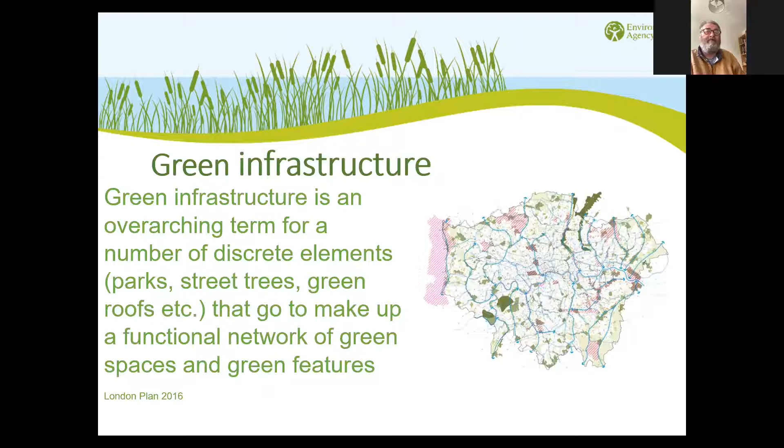Green infrastructure is an overarching term for a number of discrete elements, such as parks, street trees, green roofs, rivers and streams, that go to make a functional network of green and blue spaces across London. These are important in their own right, such as habitats and parks for recreation, and features of landscape and cultural heritage. However, by considering their design and management together, they can deliver benefits greater than the sum of their parts, either through delivering multiple benefits on specific projects or linking to larger landscape-scale initiatives to provide wider in-combination benefits.

Within London, the All London Green Grid is the policy framework to promote the design and delivery of green infrastructure for the benefit of people and wildlife. This includes blue spaces such as the Thames and other rivers, canals and ponds, and it's planned to provide a range of benefits including recreation and amenity, contributing to climate change adaptation, improving water quality, flood mitigation and reduced flood risk through sustainable urban drainage systems, providing greater appreciation of landscape and cultural heritage, protection and enhancement of biodiversity including within new developments, and increasing recreational opportunities and access and enjoyment of open and blue space for the public.

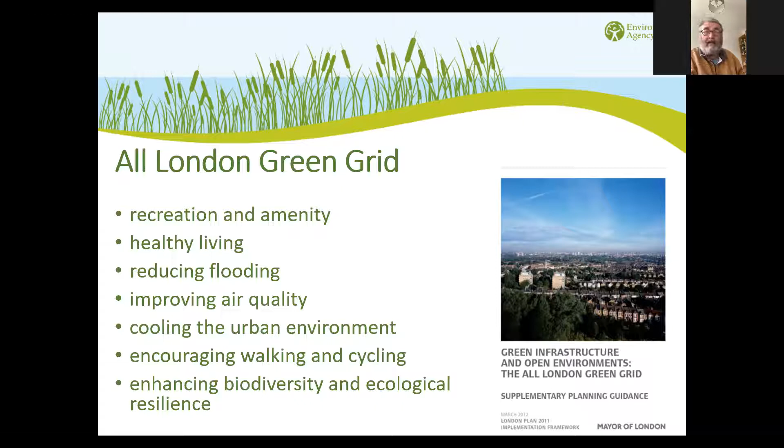Integral to delivering a successful green infrastructure project is the delivery of those multiple benefits, which can be improved through partnership working. This may appear daunting when considering single sites. However, the framework of catchment partnerships can provide support, facilitating work across disciplines and recognising the interdependency between environmental, social and economic processes within and outside catchments, and identifying cost-effective solutions which deliver multiple benefits, often through restoring natural processes and identifying unintentional consequences of actions. Estuary Edges is very much part of that work to identify innovative integrated solutions.

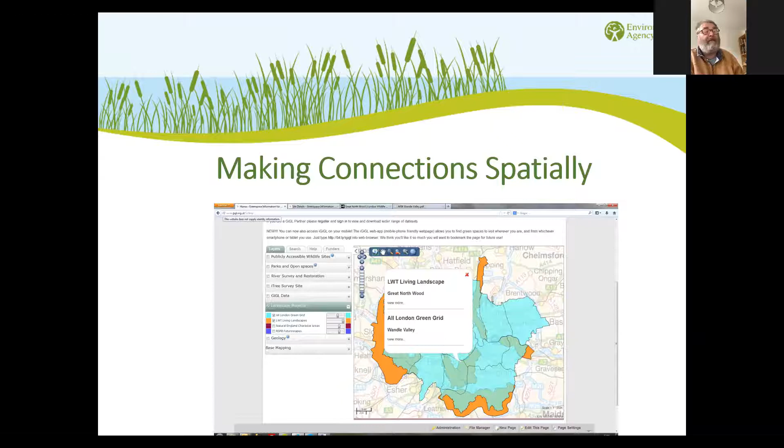To deliver integrated green infrastructure, site characterisation is needed to provide both spatial, geographical and functional context. Geographical analysis simply relates to the proximity of features and initiatives. This, for instance, may include opportunity areas for habitat creation or setback defences, and enables the site to be put into context both in terms of programme and projects, which will assist in scoping out both opportunities and risks for the development.

On a similar vein, mapping can also provide an understanding of function. This could be, for instance, ecological functions such as the migration of species like eels, or wider functions such as improved amenity and flood risk. We can see how this can deliver benefits both within a site but also link into wider catchment-scale initiatives, so where a single intervention may appear quite small functionally, it can actually be put into context with a much wider range of delivery through a catchment-scale project.

In terms of some of the geographical information, looking initially at constraints, some of the issues for the tidal Thames have been encroachment, resulting in loss of intertidal habitat, which is loss of habitat in its own right but can also impact the migration of particularly fish species. There is also potential risk of loss of green and open space next to the river, and loss of brownfield habitat, which often has a unique assemblage of invertebrates and birds. There is also potential for loss of ecological features associated with river walls. Quite often, as a wall becomes more derelict, its ecological value actually increases, and this is the challenge we have in ensuring a new river defence is fit for purpose while maintaining and improving that ecological value. Other issues, which I think Richard will talk about a little, overshading and lighting can also be big issues for successful green infrastructure next to the Thames.

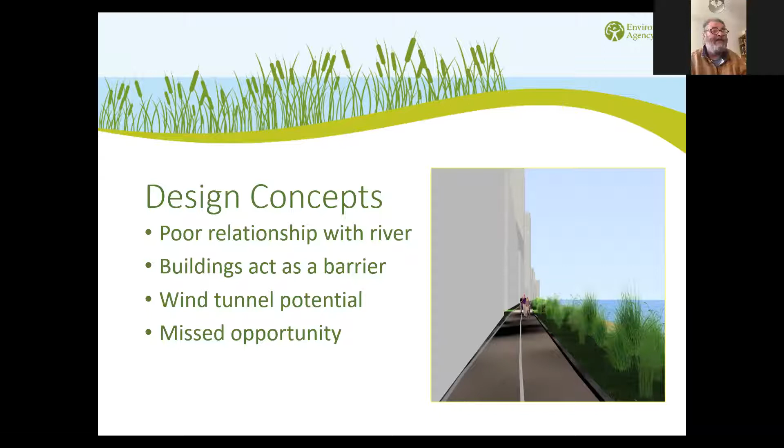On the other hand, and this is very much the concept taken forward through the O2, the Greenwich Peninsula, is the creation of setback defences, sustainable defences, where footpaths are integrated through the defence system, ecological habitats are created, maximising and improving that experience of being next to the river and creating this world-class development.

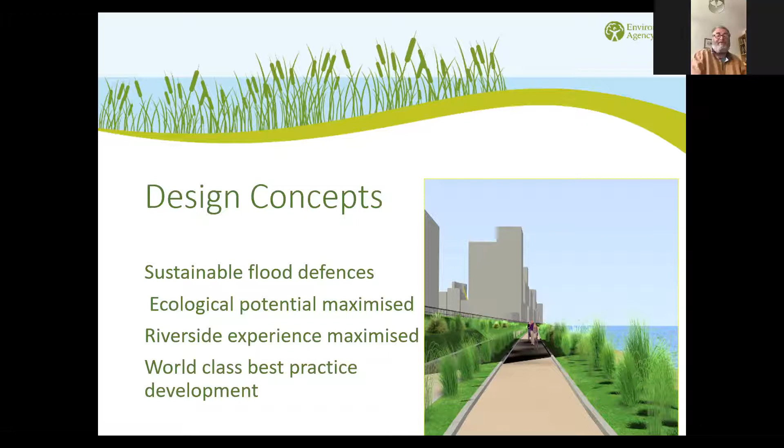So just moving onto sustainable development and sustainable drainage, clearly there is a great benefit in terms of integrating the design to enable sustainable urban drainage to meet a range of environmental challenges, from its original purpose of controlling water quantity to actually contributing to improving water quality, as well as creating new landscape and amenity features.

As part of this, there is now a whole range, a massive palette of different options, from swales to porous surfaces. An innovative solution is with brown roofs, and with this, the use of particularly some of the wasteland rubble associated with much of the Thames has provided a very good system for both retaining water and has also helped replace that brownfield habitat, which was very much a character of the Thames, important for a range of Thames terrace invertebrates, but also a rare species in the UK which is more common in London, the black redstart.

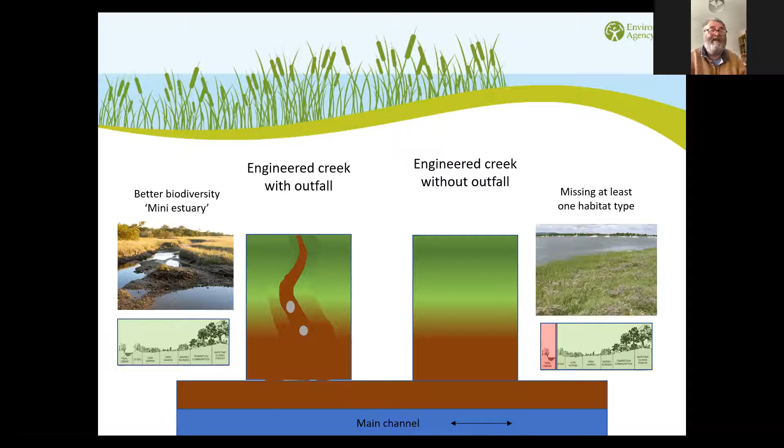I think I just managed to do my time. And that's it. Thank you, Dave. I really appreciate that. That was really interesting, and particularly your comments about making the small interventions in terms of connectivity and how that can help habitat. And I think we'd like to hear more about that in due course.

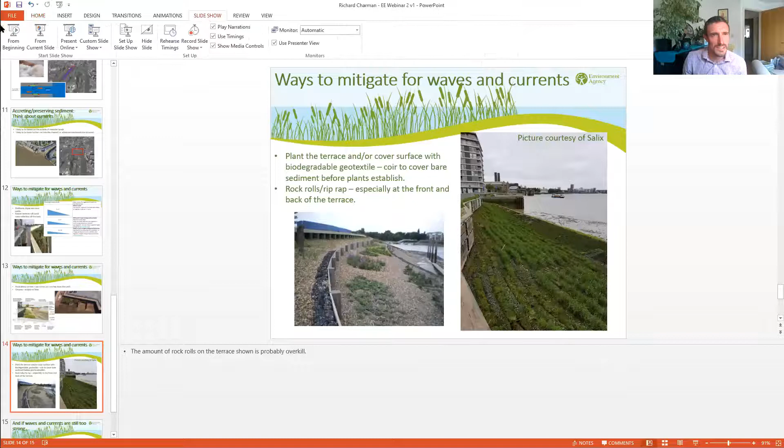So originally I was going to choose a slightly more boring title for this, on how to create a perfect terrace, which effectively is what this is. As a geomorphologist, the sediment element of this and also the levels is probably the most significant to my daily work. But in many ways, litter can be treated as a sediment type as well, the way it's washed into an estuary edge.

So for anyone who's actually looked at the Estuary Edges website to date, and I would highly recommend it, it's set up with a series of design principles, 17 design principles that if you follow, then you should be able to design and build a good estuary edge feature, as we've called them. And within that, principles 3, 5, and 10 cover these elements of litter, sediment, light, and levels.

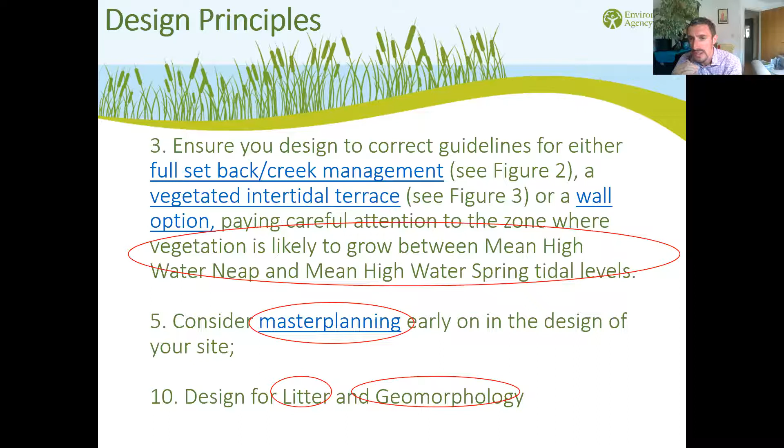And number 10, I think we must have got less adventurous when we got lower down on the list of the design principles, and we said design it for litter and geomorphology. You have to click on those to find out a little bit more information. So I'm going to go into those elements in detail over the next 12 to 13 minutes.

Firstly, getting levels correct. Now, this is actually surprisingly difficult to do if you don't have a local tide gauge, and levels vary throughout estuaries as well, so you can't assume that the level at the mouth of the estuary will be the same inland. So some form of logging device or getting in touch with the local port authority to know exactly what these levels would be is important.

Now, what we're missing predominantly in urban estuaries, such as the Thames, is the vegetated area. I've tried to show, so in a natural estuary, the bottom left-hand corner photograph would show the transition from mudflats through to different zones of salt marsh and then up into more terrestrial vegetation. And effectively what we're trying to do is compress that with an estuary edge feature, as you see in the bottom right-hand photograph, which is, I think, Saxon Wharf in Deptford Creek.

And I've tried to show that in cross-section above that, with the low tide blue water and then going across the mudflat up through the different zones with the salt marsh creek and up into the terrestrial. And the zone that vegetates, the one that we're missing in urban estuaries, is between your mean high water springs, the top line, and the mean high water neaps, the second to top line.

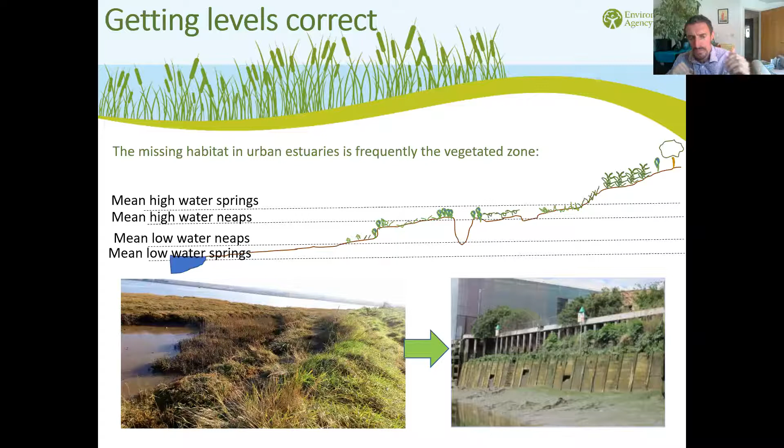Reducing litter trapping. We learned a bit about this with the review and relaunch of Estuary Edges three years ago. By all means, these are still hypotheses in a way, and I think they still need testing with research. If there's anyone from any universities on the line, this would be really useful for us to know more about.

We believe that changing the orientation of the mouth of the creek matters. In my last presentation I went into the three designs: naturalized setback creeks, terraces which are more engineered, and timber bolt-ons. If we're going for the most natural form, you can change the mouth of that creek, and the direction would potentially prevent litter from being washed in.

Generally the prevailing wind, we believe, is what washes litter into these features. The bottom left photographs show the River Roding over to the east end of London, and the green areas show the creek, which is very easy to discern in the top photograph. In the bottom photograph the creek is less easy to discern, but it follows the lush green reeds in a kind of tick shape. Both of them are similar shapes.

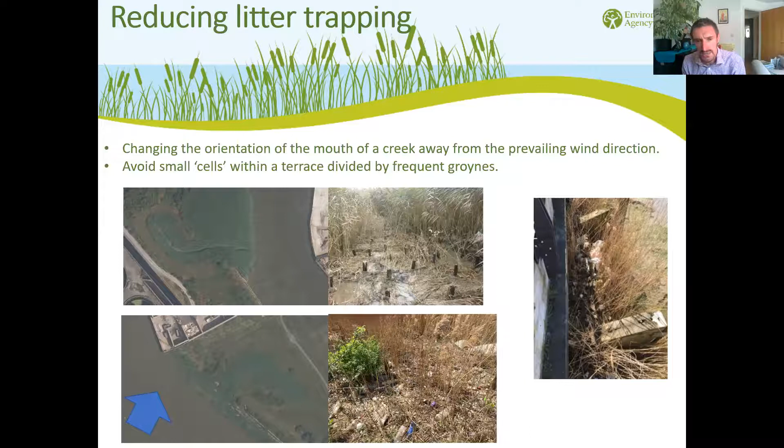Further to that, we believe that tall plants, such as Phragmites, are particularly good at trapping litter. Variation of plant type, as shown at Battersea Wharf in the bottom right, with different levels of plants, would reduce the amount of litter trapping.

We know that the one site where a boom has been used, also at Battersea Wharf in the bottom right-hand corner of your screen, the booms actually prevent fish passage, at least fish from exiting the site. And they tend to break - they have sliders and run up and down with the tide. We don't know any good examples where they've actually been successful to date, so it's led us to the advice that they should only be used if absolutely necessary.

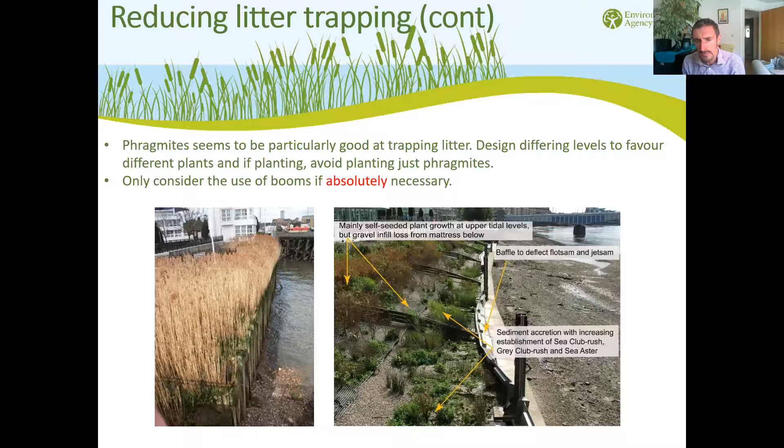Ensuring enough light. This aerial photograph on the right of your screen actually isn't on the Thames, it's on the Medway, but you can see it was taken late in the day, or maybe on a summer's evening, and you can see the length of those shadows from those tower blocks across the mudflat and out onto the water. Now, I can't guarantee that photograph was taken at extreme low tide, so there may be more mudflat there.

Therefore, you know that if you're on the south side of an estuary with a north-facing development, those terraces probably won't get a great deal of light, and they may not be entirely successful in their vegetated nature.

We were presented with the car park with the derelict barge that you see in that photograph, and our advice was to put the terrace on the western side of that built-out area, so it will get the evening sunshine, and to actually avoid the north side of that site. So if you've got the luxury of having multiple sides of a development, we would recommend that the north side is actually avoided, and that there's a concentration of terraces built on the east or west sides.

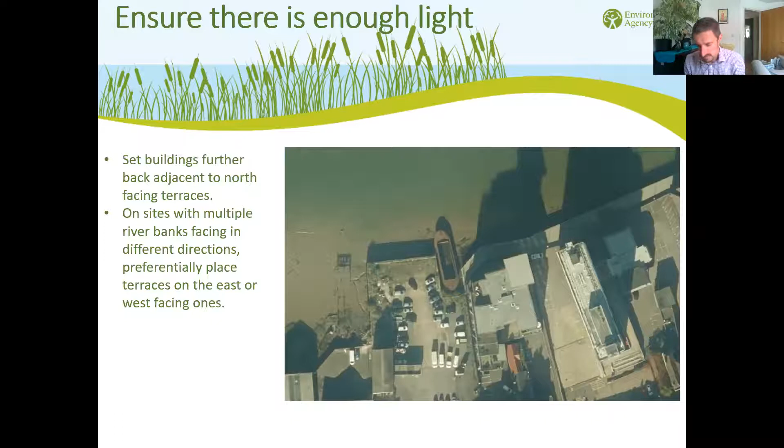Also, in the Medway - this is something I would like to achieve in London, and we haven't yet managed to - the construction of a large, long creek, which has that succession of salt marsh, mudflat through to different salt marsh zones that I showed you in the earlier photograph. That was achieved here on the Medway, and recently I went there with Dave Webb, and we spoke about it.

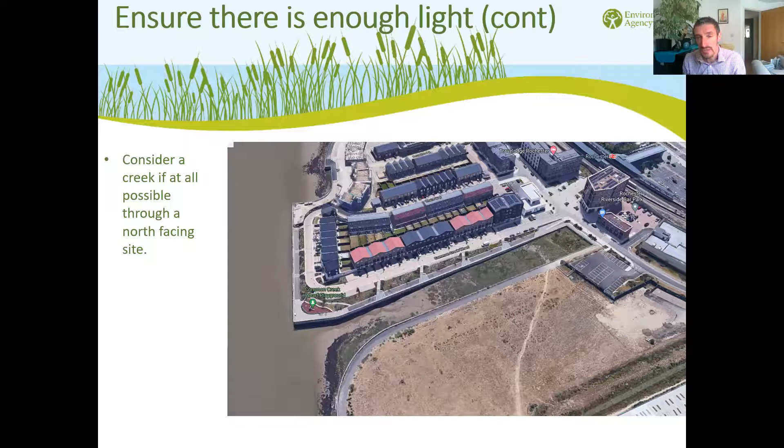Now we know that creek will probably vegetate and fill in quite quickly because there's limited freshwater drainage. So a missing trick with that creek - it is amazing, but it doesn't have the outfall going through it. And that's particularly relevant if your site is north facing as well, because it will get rid of that problem.

The depth of your terrace, now with some of the infrastructure—there may be pipes, tunnels, outfalls as we already discussed, coming to the river's edge—may present problems for the depth a terrace can be designed at. But we found from experience that 1 meter depth seems to be successful. If it's less than 1 meter, there's a higher risk of either the terrace not responding in the same way as a natural mudflat, or wave energy washing out the sediment.

In the worst case, you're seeing one end of one of the sites on the Greenwich Peninsula where washout has happened to the lower terrace, and you can see that really isn't a great depth of sediment.

Equally, drainage holes, so that the mud and gravel in that location doesn't become waterlogged, is important as well. There's a cross section of a site—the site doesn't matter in the middle of your screen—and we think that fill was too shallow in that location. The photograph on the left shows waterlogging.

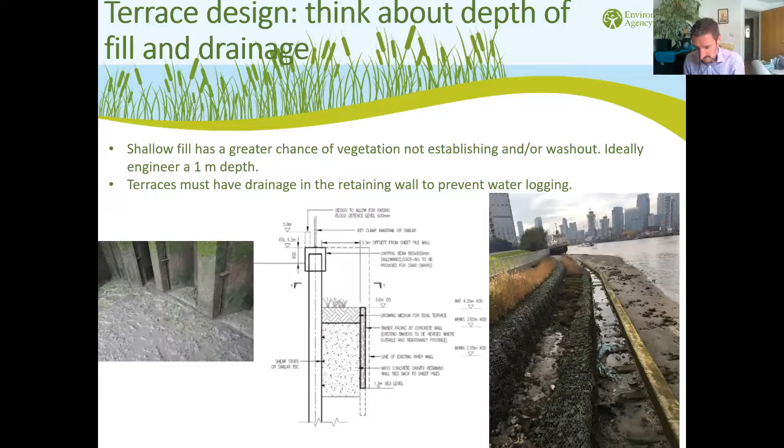A lot of the terraces we look at, we're creating to a specific elevation, but if you get it slightly wrong, it shouldn't matter, because ideally it will accrete with sediment. In a muddy estuary such as the Thames, you've got a vast amount of sediment to fix that problem, and providing it's not going to get washed out by waves and it's in a quiet enough location, it will accrete to a certain elevation behind that engineered feature if necessary.

In some estuaries, such as down in the southwest in Devon, where the difference in water colour is notable, there is actually much less sediment in suspension in the first place. So the accretion rates and the success of your feature, which may be down to the level not being got quite right, or maybe the design not being got quite right, would be exacerbated and fixed slower in an estuary where there's less sediment.

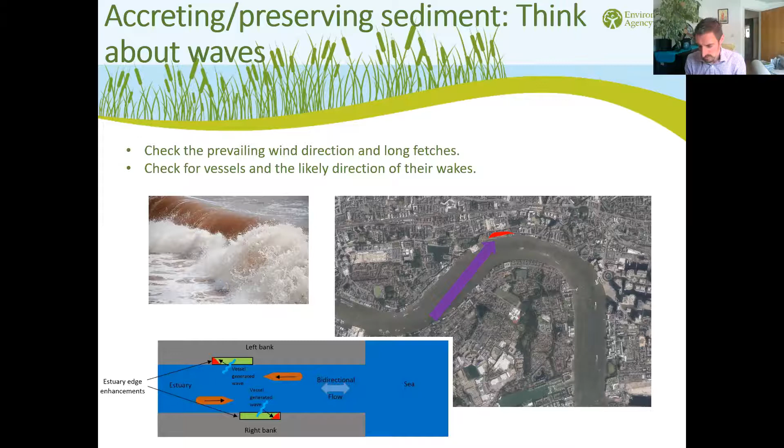Furthermore, thinking about currents and also where previous encroachment has occurred—construction outwards into the channel and the narrowing of the channel is known as encroachment, as Dave spoke about earlier. The likelihood is that currents on a terrace further out into the channel are going to be higher, so avoid areas that are encroached. Equally, on the inside of a meander bend you tend to get depositional features, while on the outside you tend to get scour and erosion, because currents are more turbulent there. Thinking about all of these features to work out where your terrace should be, and what design it should have, will help in creating a successful feature.

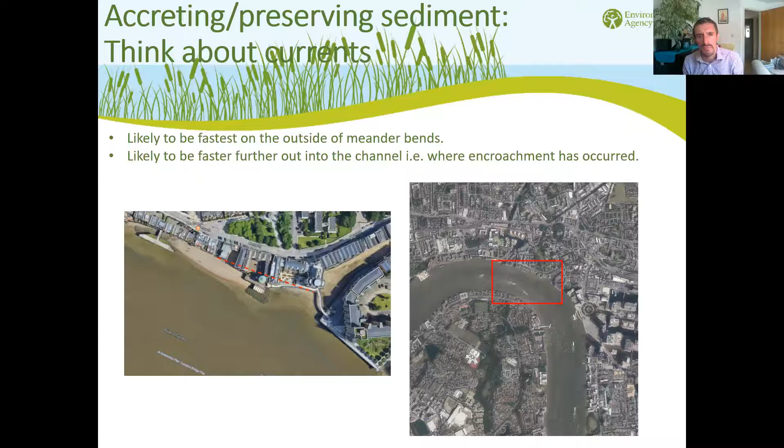So, ways to mitigate—don't abandon all hope. I don't want to give the impression from the last 3 slides that it's impossible in those locations, because it is possible to build something that will work.

A steep terrace will have less chance of success, more likelihood of sediment being washed out, and more likelihood of vegetation not taking hold. We think 1 in 7 is about the slope that will work in a low energy environment, 1 in 10 will work in a higher energy environment, and if you get too steep, say 1 in 4, that won't work in any environment. We believe Battersea Wharf, where I showed you the boom earlier, was steeper than 1 in 7, which is one of the reasons sediment hasn't accreted. So the message is: shallower slopes are more stable.

Equally, if you've got a narrow terrace from front to back with a very hard, tall wall at the back, you're likely to get wave reflection, be that wind or vessel generated, which will cause scour.

The bottom two left photographs show the same site—that's Royal Wharf that Dave spoke about—with deep, luxuriant vegetation growing where the outfall has been located with the SuDS. Along the rest of the site, there's a really narrow, almost less than 1 meter terrace, which really hasn't succeeded well. We think that's because the fill is too shallow—the cross section I showed you earlier was that design—and also the depth is too shallow for the amount of wave energy in that section of the estuary. So that site has great success with the deep terraces, but less success along those narrower terraces.

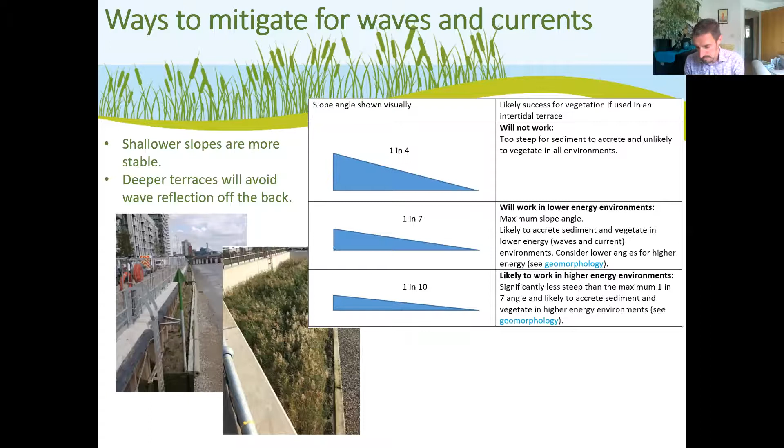Further ways to mitigate. I hinted at groynes earlier being bad for litter, but they have a purpose - they help slow currents, particularly on the outside of meander bends. That was done at Battersea Wharf, shown in the bottom left-hand photograph, and I think they've worked quite well there.

They've also worked quite well at Point Wharf, near the Millennium Dome in east London, shown in the right-hand photograph. However, you've got to think about the wave direction and whether there's a lot of litter that might get trapped in those groin bays. I think at Battersea Wharf the groyne levels are quite low, which may have helped.

It's easy to build in boxes - easy to build sheet steel piles and concrete walls in boxes - but if that forms a sharp corner in the direction wave energy will approach, it becomes a problem, exacerbating that wave energy through reflection. We've yet to work with a developer to build a site with curves. Our planning specialists will talk about a site at Flintglass Wharf where there are curves - it's yet to be built, but we have that potential success still forthcoming.

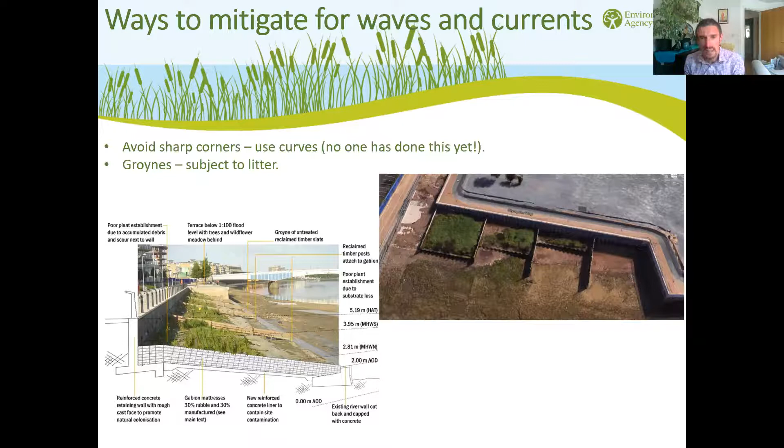Further ways to mitigate: if you read estuaryedges.co.uk, you'll see it like a broken record - it keeps saying don't plant your site unless absolutely necessary. As a developer, most people want it to be green straight away, so it's rare we've managed to achieve that. The reason being it's nice not to have a monoculture, and it's nice to get the vegetation that would naturally be there in the first place.

However, if wave energy or currents are an issue, pre-planting, planting up ready can help, as shown by both sites on your screen. The bottom left is the mouth of the Wandle in west London, and the new site, not yet on our website - that picture courtesy of Salix - is Riverside Gardens at Greenwich, where you can see rock rolls interspersed with pre-planted coir sausages with Phragmites on them.

Those rock rolls could also be loose riprap - they don't necessarily have to be in bags - and they probably need to be at the rear and at the front of the terrace mainly.

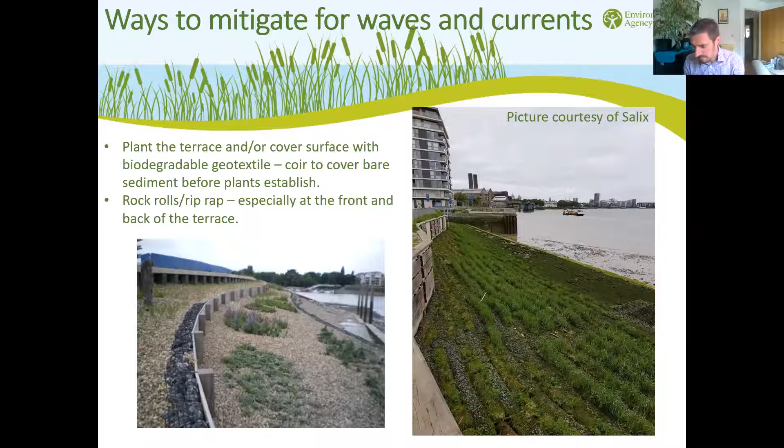I think I'm about right time-wise. If all else fails, there is still value in having a cobble or gravel terrace. So creation of what you see on the screen in an engineered form would have value for invertebrates within an estuary. Thank you very much.

Thank you, Richard, that was really brilliant. Richard mentioned a few times in his presentation to look at the Estuary Edges guidance and the principles, and I'd encourage you to do the same. A lot of expertise is needed to look at the sites, so plan early and have a look at the principles when you do your master planning.

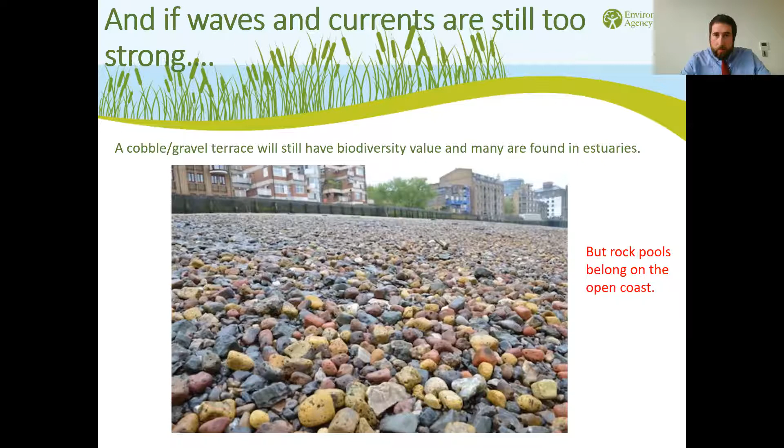I assume that's now sharing and you can all see that, I hope. Good afternoon everybody, I'm David Allsop, Assistant Harbour Master at the Port of London Authority, and today I'm presenting on the features and design considerations in the interests of safety and navigation when implementing an Estuary Edges site.

Introduce the Port of London Authority. I'm sure many of you are well aware, but if not, just a potted rundown of who we are and what we do. The PLA is the Statutory Harbour Authority.

Our main piece of legislation is the Port of London Act 1968, which has been amended several times since then. The Act gives us various duties and powers in the interests of conserving, maintaining and improving the Thames, which is our central purpose and reason for being.

We're responsible for approximately 95 miles of the tidal Thames, from Teddington Lock in the west all the way out to our outer limits, well out into the estuary and essentially the North Sea. That's a total area of about 600 square miles, over which we manage the safe movement of shipping, as well as the conservation and improvement of the tidal Thames. Our jurisdiction extends to mean high water on the Thames and to all tidal creeks adjoining the Thames within our overall limits. So it's a very large area we're responsible for.

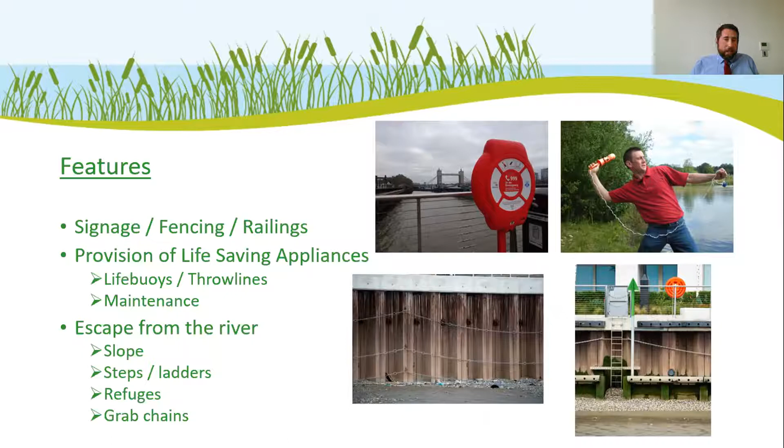Moving on, lighting and marking of your works and what you've installed - again, that'll be in consultation with us whenever we go ahead and issue a RiverWorks license. We'll have to consider: is it impinging on the navigable channel, in which case it probably won't be something we'll approve? Is it going to cause a hazard to ships and boats, recreational users and people using the river? And what can or should we do?

The PLA has a duty to survey the Thames and publish those surveys, and we issue our own charts for the use of mariners navigating on the river. We make sure any new installations or works are properly noted on those charts so that mariners are aware of them and can plan their passages appropriately.

And any lighting installed must not distract from safe navigation. That's also in the Port of London Act - we can take action if lights are being displayed such as to endanger the navigation of vessels on the river.

So again, early consultation and discussion with ourselves is needed regarding these rather specialized navigational features, from the point of view of professional mariners and sailors, and what they will need and expect, and how best to communicate it to them. As we go on, I believe this is my last slide, so hopefully I'm on time here.

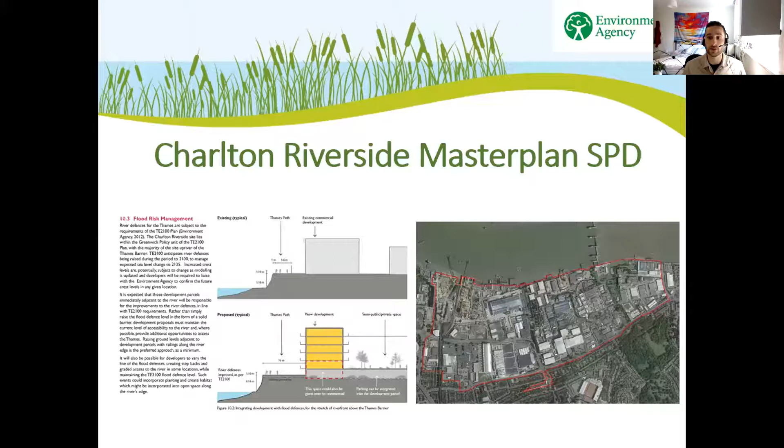Next slide, please. The Charlton Riverside Master Plan, SPD 2017, will involve the creation of 5,000 to 7,500 homes. It mentions there will be a creative design response to the need for flood protection. The plan also includes guidance on how developers can introduce and improve biodiversity along the river edge. It states on page 118 that it will also be possible for developers to vary the line of the flood defence level. Such events could incorporate planting and create habitat which might be incorporated into open spaces along the river's edge. Next slide, please.

So I'm now going to hand over to my colleague Rachel, who will speak about Flint Glass Wharf in Greenwich.

Good afternoon, everyone. As Morgan said, I'm Rachel and I work as a planning advisor for the same team as Morgan in the Environment Agency. Thank you to Morgan for that introduction on how the Environment Agency interacts with the planning process through its Sustainable Places teams, and for demonstrating how planning policy is aimed at trying to enhance biodiversity along the river corridors, which is in line with the Estuary Edges principles.

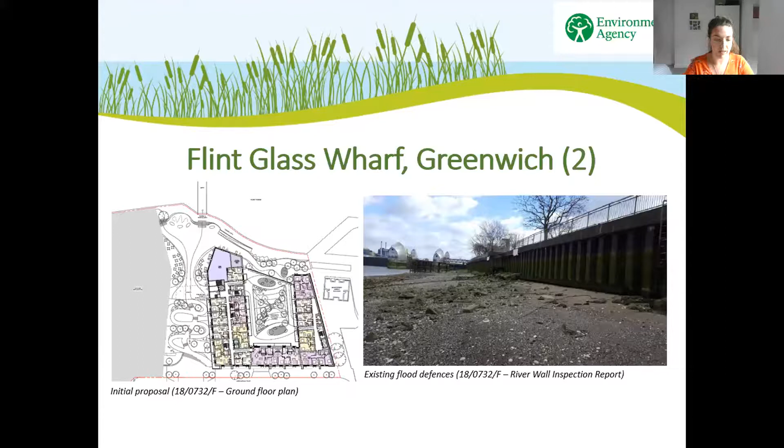So after our initial objection, we were contacted by the consultant to get advice on how to overcome this objection. This involved lots of different meetings, reviewing documents and plans and their different designs outside of the statutory planning process. They first came to us with no tidal terracing, but we had some meetings to discuss what our ambitions would be for the site in terms of ecological enhancement.

This includes an additional curved tidal terrace, achieved through further setbacks of the flood defence. In addition, they also placed the surface water outfall so that it drained through the central terrace. The curved terraces themselves are also zigzag terraces with a gentle sloping gradient, which Richard mentioned earlier as a key design criteria.

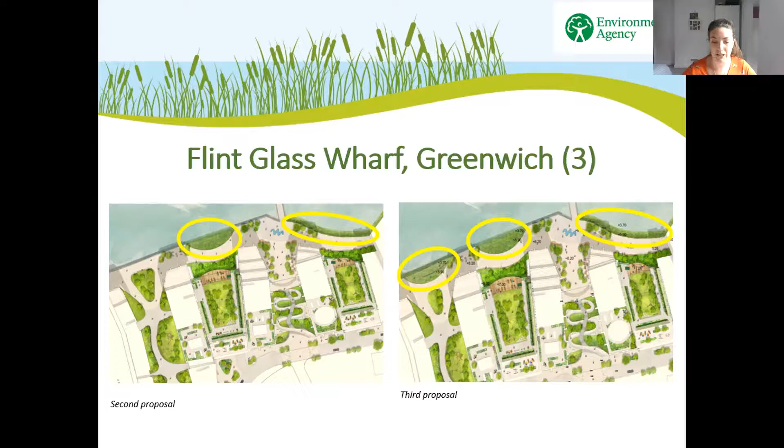So we're really pleased that the designs have been finalised through this process, through working closely with the consultant and the council as well. We're now just awaiting formal submission through the statutory planning process to formally remove our objection, now that these biodiversity enhancements have been achieved.

So that's kind of a brief example of how tidal terracing has been implemented through the planning process. Now I'd like to talk a little bit about some of the key points to take away from that process and how to implement it.

It's important to reiterate some of Dave's earlier points on the importance of partnership working and engaging really early with different organisations involved in the planning process. As Richard mentioned, there are lots of different aspects that feed into the final design of tidal terracing, and these are dealt with by lots of different organisations.

For example, the lead local flood authority is responsible for reviewing drainage strategies. The local planning authority and their design team are responsible for commenting on things like building heights and site layouts. And the Environment Agency is responsible for advising on the main river biodiversity enhancements and all aspects involving the flood defence works.

It's really important to discuss early on with all these different parties to ensure the best design can be achieved. You don't want to have discussed the whole site layout with the local planning authority, or the drainage strategy with the lead local flood authority, only to realise that to achieve the best tidal terracing design the flood defence needs to be set back and the site layout needs to change, or the drainage outfall needs to be relocated to benefit the terracing. So it's really important to think about how these things interact really early in the design process.